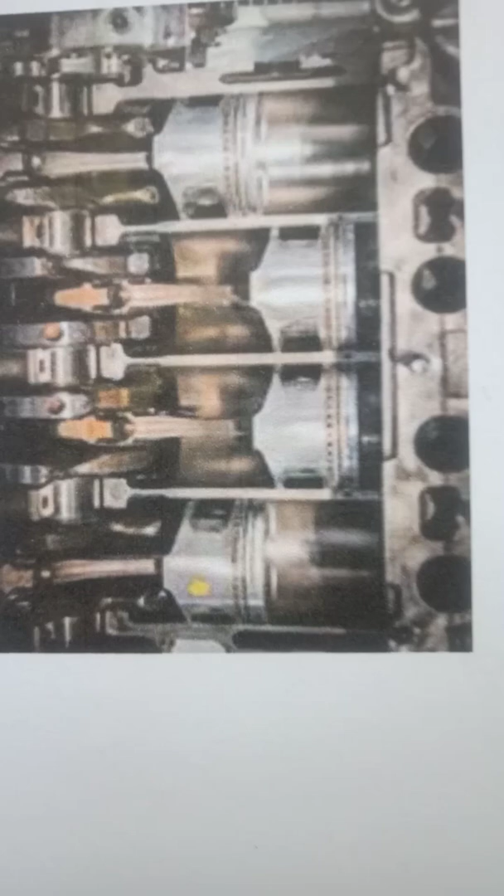So good morning friends, today we will discuss the honing process. Honing is a super finishing process used to remove a very fine amount of particles from cylindrical surfaces, such as the cylindrical bore shown in this figure. This is the cylindrical bore in which the piston is reciprocating up and down.

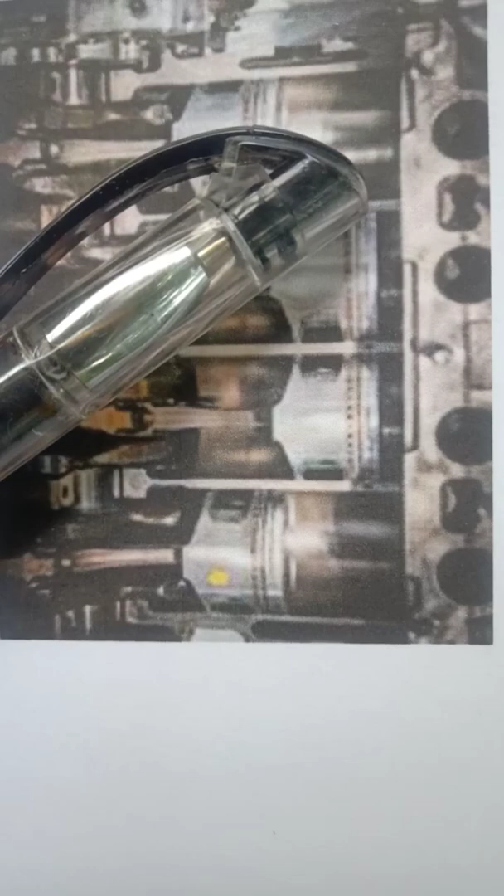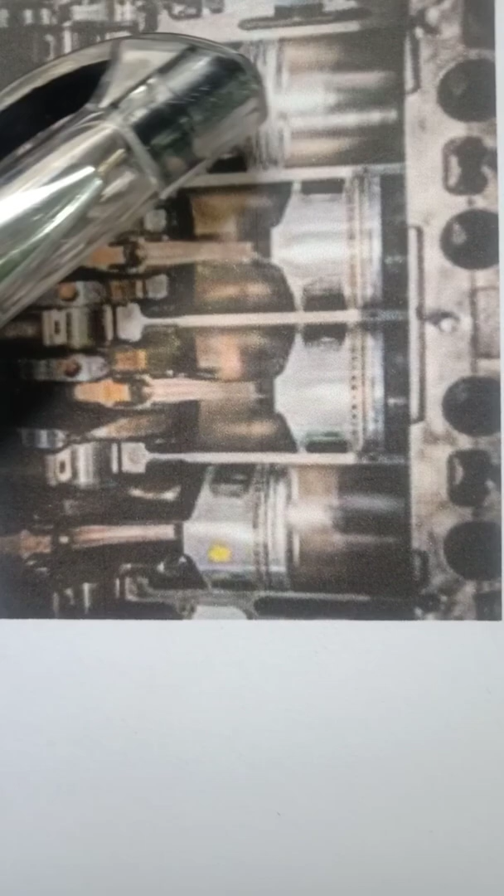Now what happens inside the IC engine after running it for a prolonged interval of time, such as 2 lakh to 3 lakh kilometers? The gap between the piston and cylinder increases substantially. Due to continuous reciprocating motion, there is wear and tear of the piston and cylinder, and the cylinder gets worn out, meaning the bore of the cylinder gets enlarged, causing excessive clearance between the piston ring and cylinder bore.

Now if there is excessive clearance between the piston and cylinder bore, then all the compression present during the compression stroke, during the power stroke, all the pressure generated at the top of the piston will escape out from this gap between the piston and cylinder, that is, between the compression ring and the cylinder, into this clearance volume.

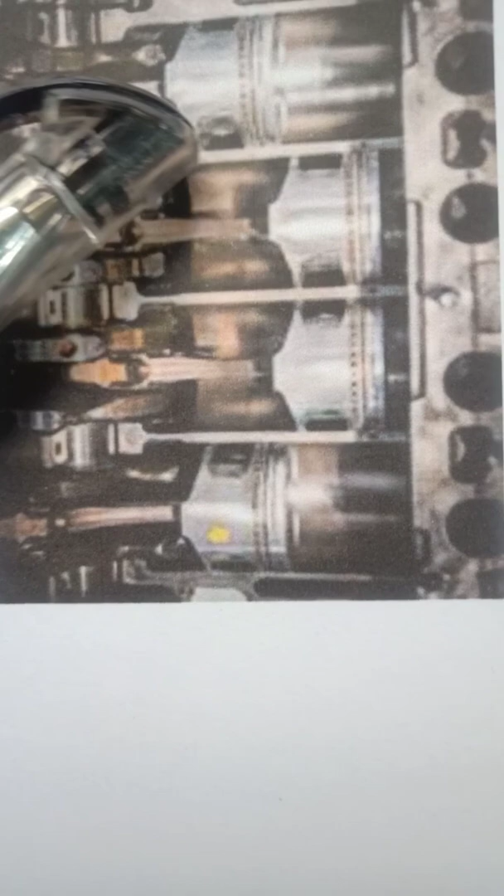Due to that clearance, the pressure generated will escape through this gap into the crankcase, causing back compression in the engine. That means the compression pressure present at the top of the piston will be reduced, and due to this the power and efficiency of the engine will be reduced.

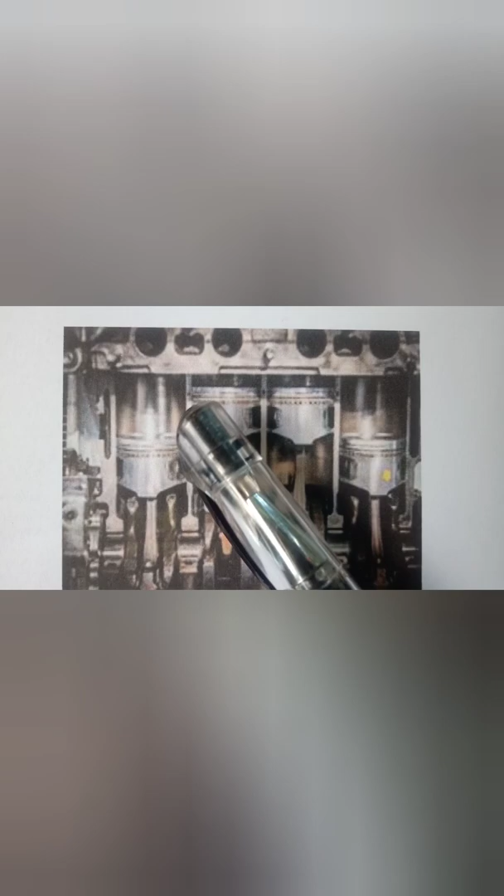Now this problem of back compression can be restored by enlarging the bore of the cylinder, that is, increasing the bore diameter and putting an oversized piston inside it, so that the clearance between the piston ring and cylinder wall is at the recommended level. It should not be too large and should not be too small.

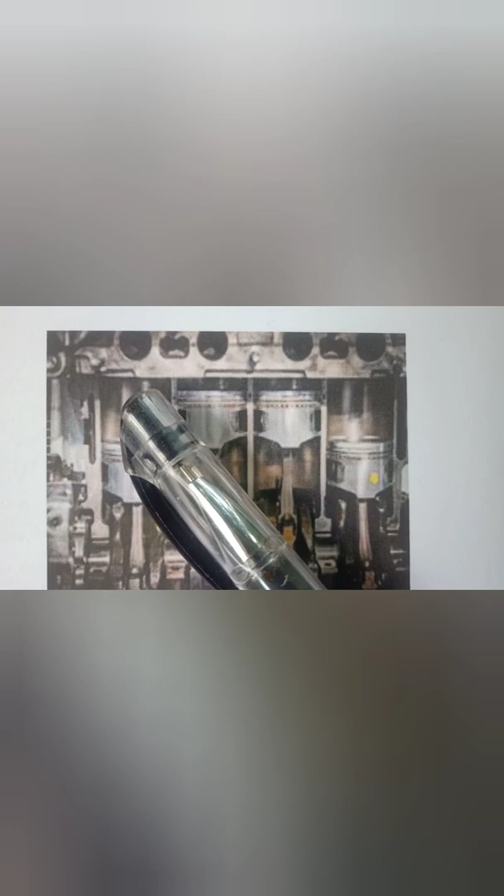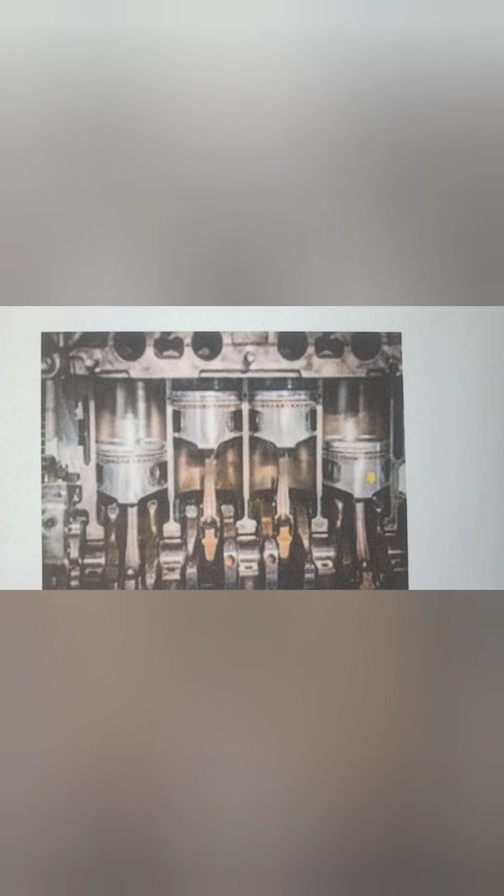If the clearance between the piston and cylinder is too large, then all the pressure produced during the power stroke in the clearance volume will escape through this gap between the piston and cylinder, and the pressure on the piston will be reduced. Due to this, the power and performance of the engine will be reduced. And if the gap is very small between the piston and cylinder, then as the engine temperature rises...

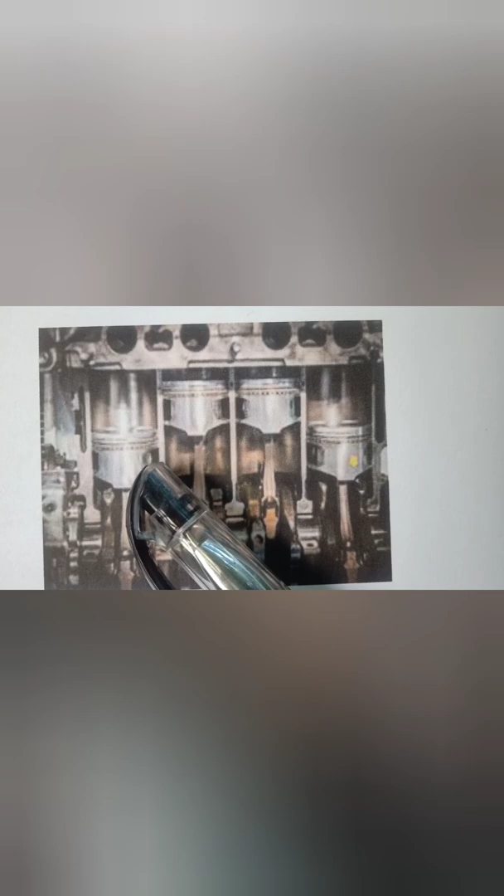As the engine temperature rises, due to expansion there is no clearance between the piston and cylinder, so the piston will not reciprocate. As there is uneven expansion of the piston and cylinder, the piston will not reciprocate freely, and there is power loss due to excessive friction between the piston and cylinder. In the worst case, the piston and cylinder will get seized if there is no clearance volume between them.

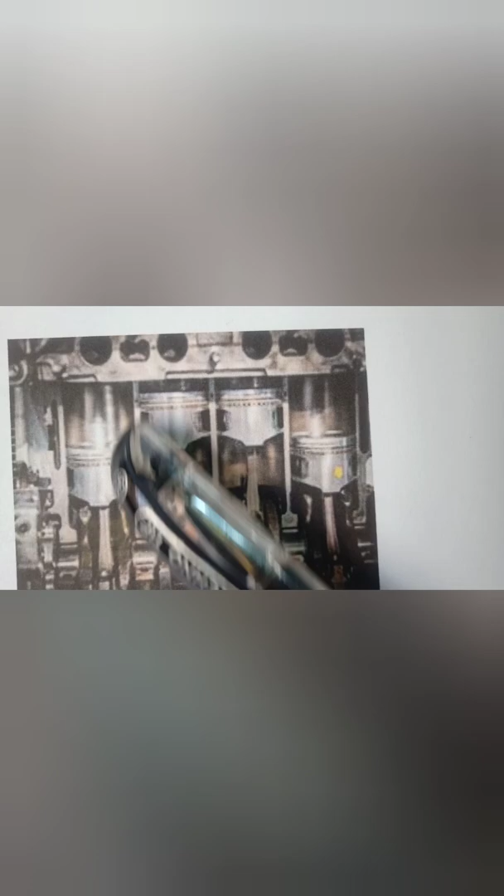So this clearance is very important between the piston and cylinder. In other case, if the clearance is excessive, this is also harmful because most of the pressure generated in the power stroke will escape through this clearance, causing back compression.

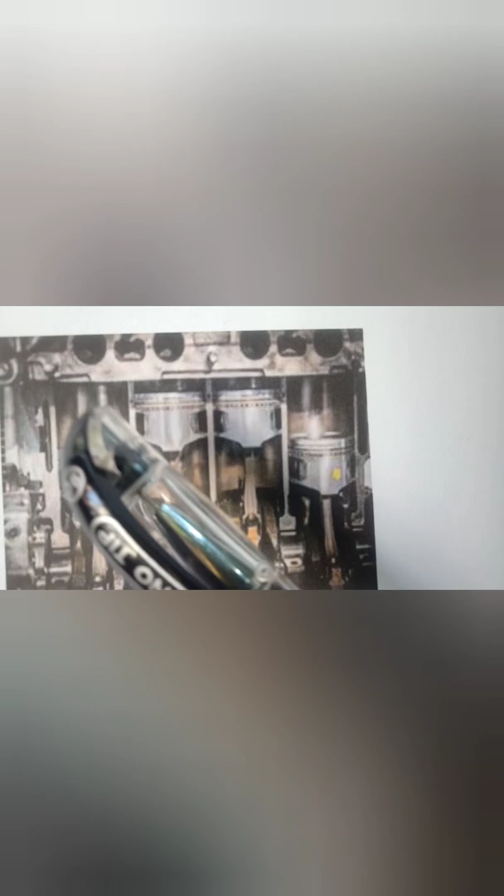So in that case, we have to bore this cylinder, and we have to install an oversized piston in this bore, that is, in this cylinder.

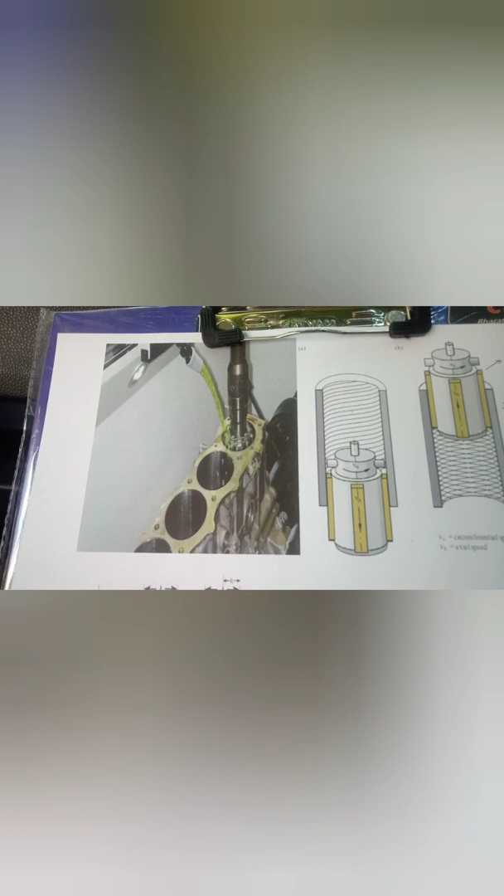Now this is typically a boring process in which there is a vertical boring machine where the cylinder is bored to a larger extent, that is, the diameter of the cylinder is increased slightly, and due to this a bigger diameter piston can be inserted inside the cylinder. So this is the boring process.

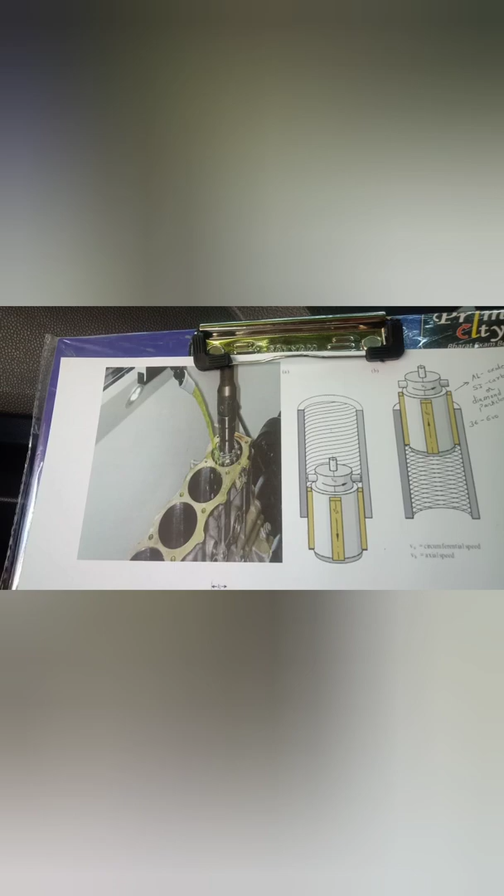So this is a boring tool which will remove the material inside the bore, and this is the coolant. The coolant is added in this boring process so that the boring chips can be carried away by it.

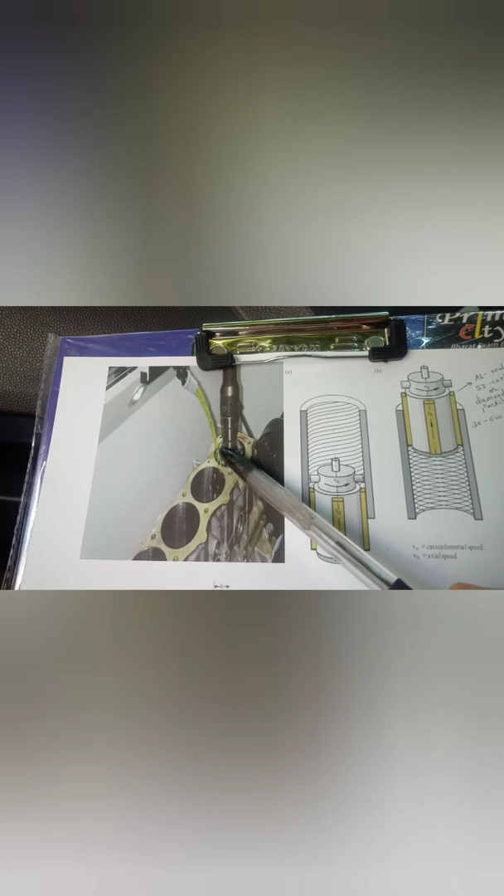After boring, the honing process will be done on this bore. After boring all four cylinders, the honing process will be done. Now what is the honing process? We will see that now.

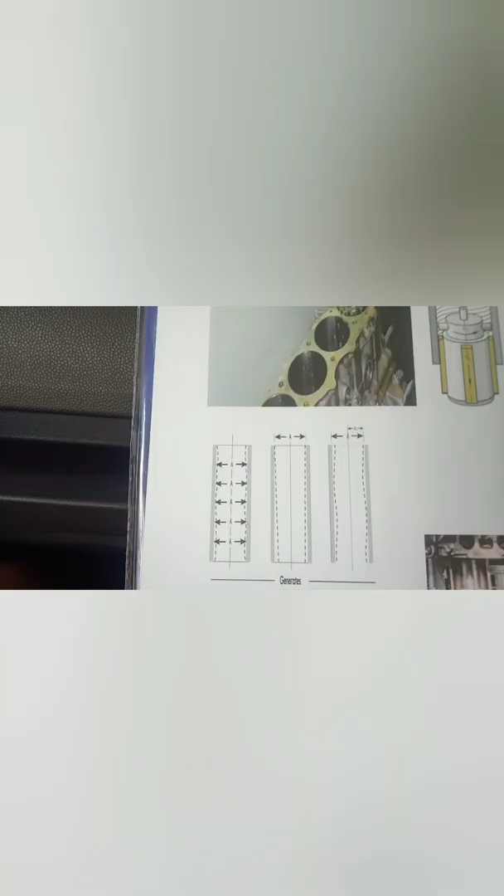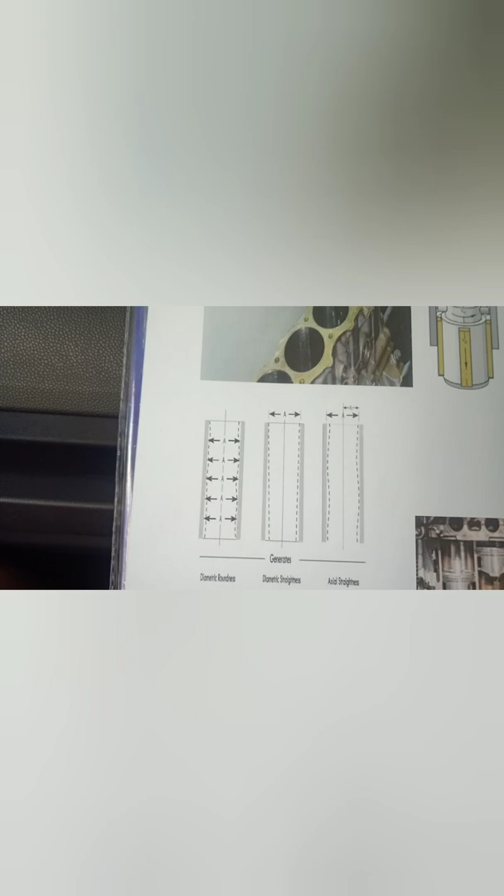If we bore any cylindrical surface, it is not always possible for the boring to be 100% perfect. There are certain irregularities in the boring, such as diametric roundness - that is one problem in boring - and then diametric straightness.

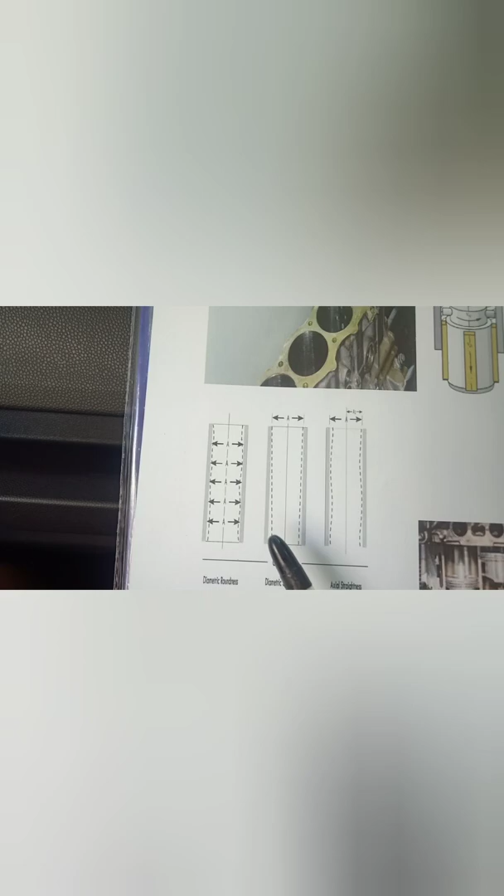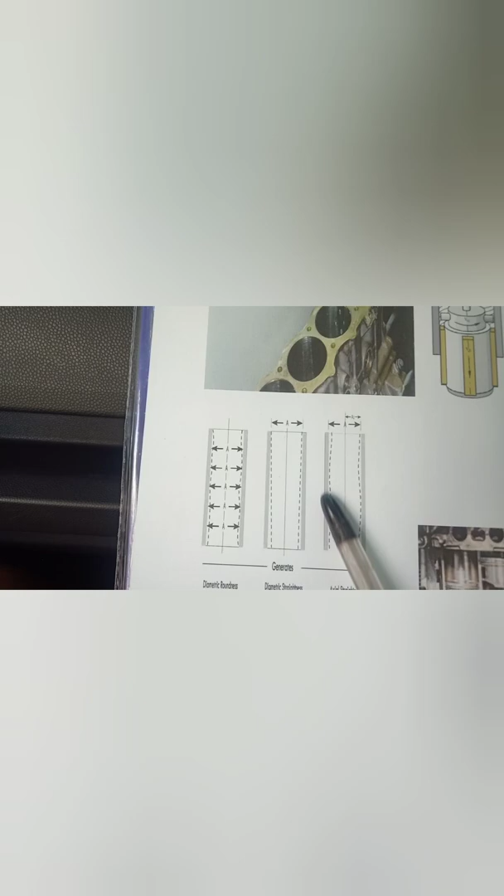Okay, straightness is not there. This is a tapered one. The boring is slightly tapered. This is also not accepted. Then third is axial straightness. Axial straightness is not there. Somewhere there is excessive boring, somewhere there is less boring. That is, the straightness is not there. So these are the problems faced during boring.

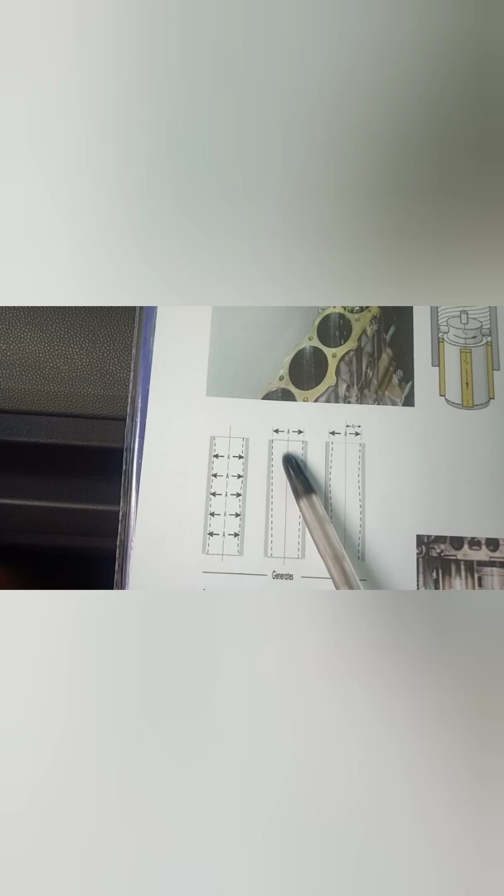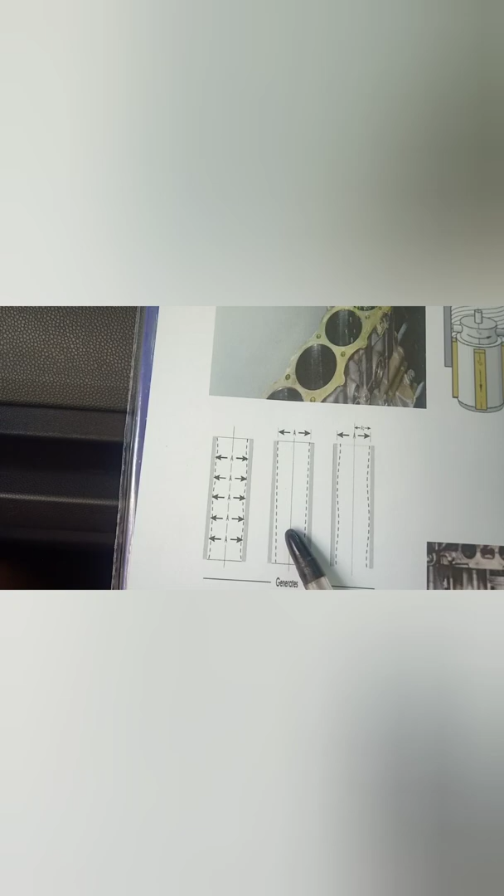So what happens if we bore the cylinder and directly install the piston? The piston will not reciprocate properly in such kinds of bores. For example, in this portion the piston will reciprocate freely, but as the piston moves down, it will not reciprocate freely here, because there is a diametric straightness problem. As you see in the diagram, the diameter is reduced here as compared to there, due to which the piston will get jammed in this portion. In this portion the piston is relatively free. So the piston will not reciprocate in such kinds of bores.

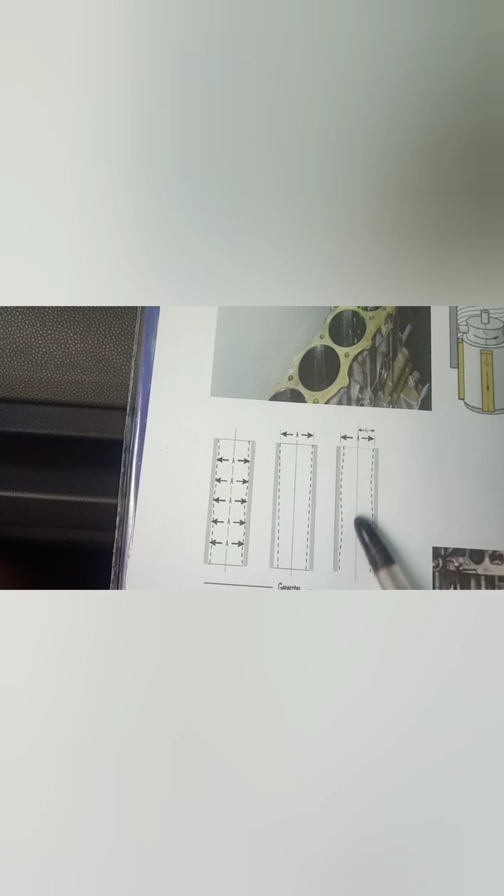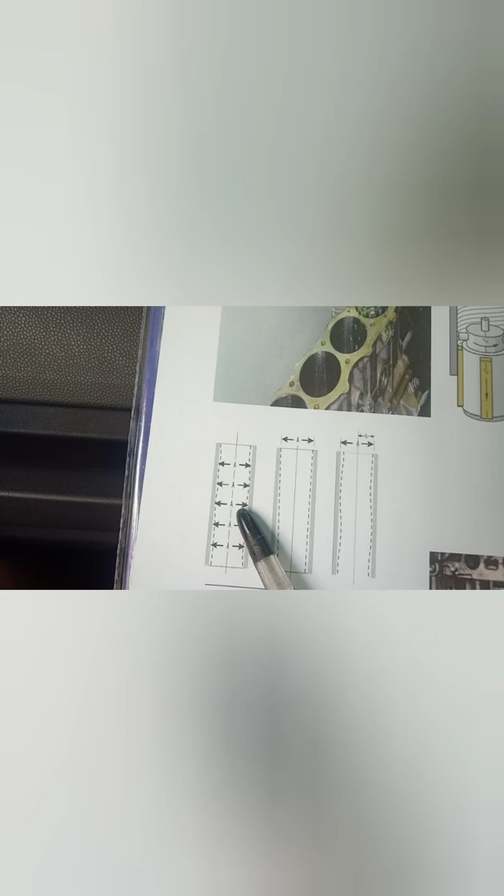So these defects have to be removed, and it is very important to remove such kinds of defects. For this purpose we have to perform a super finishing process called the honing process. Now, what is the honing process, that we will see.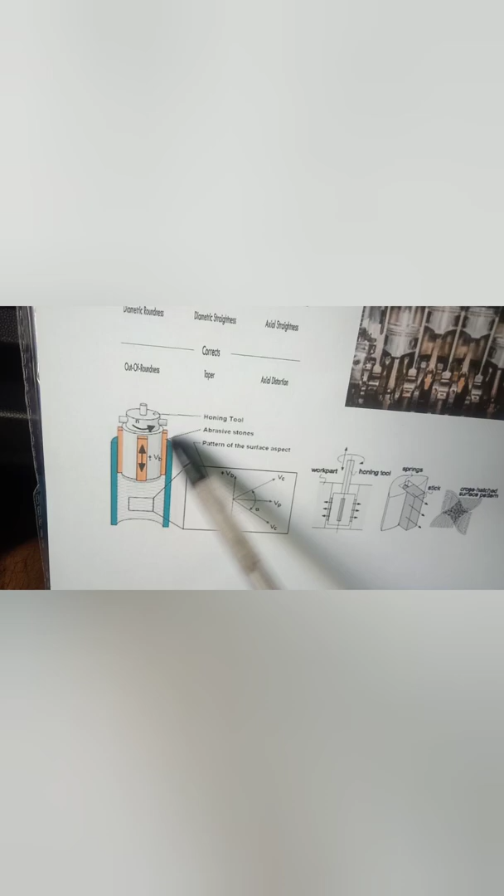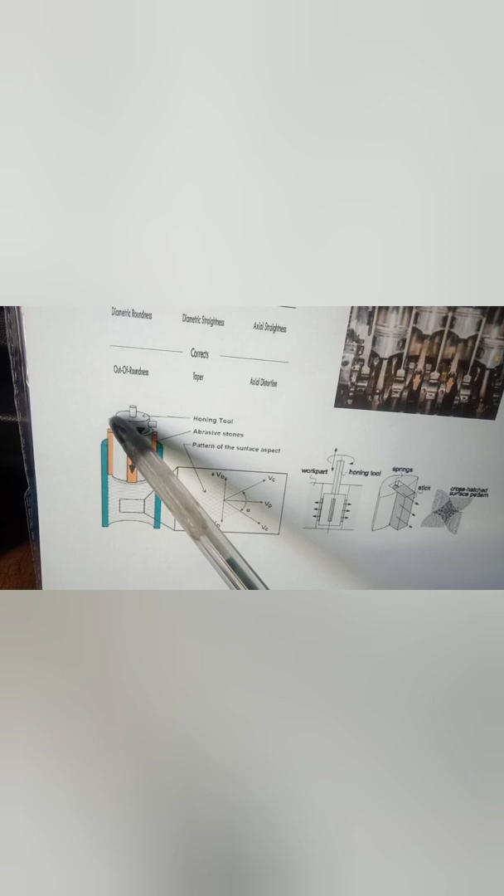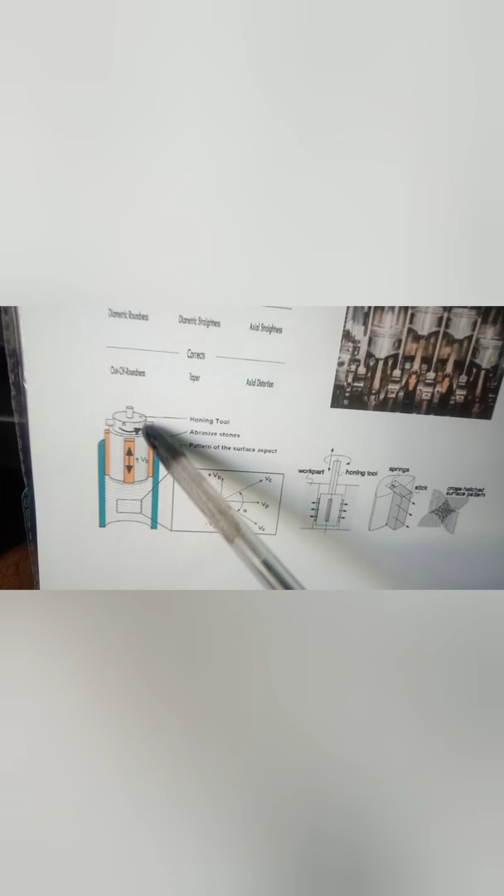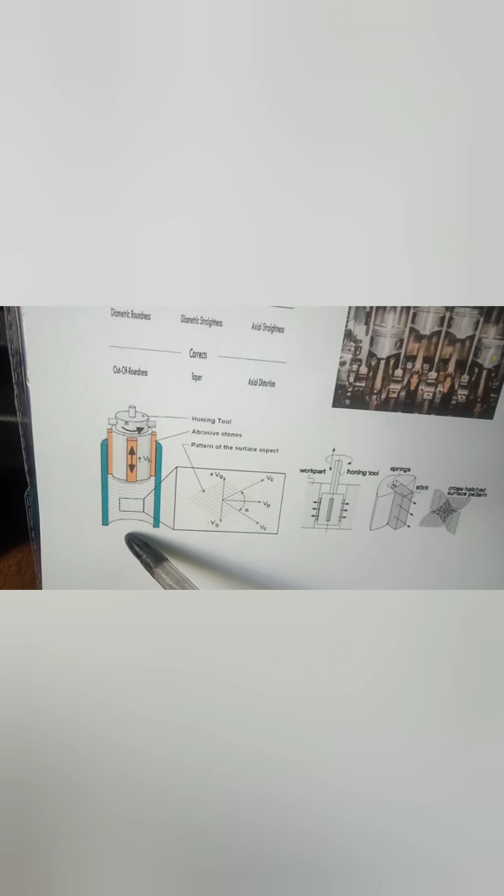Now to remove the above mentioned defects, as I showed earlier, this honing tool is used. This is the honing tool in which there are abrasive stones like this. These are the abrasive stones, and this is the cylinder in which this honing tool will rotate in the anti-clockwise direction as shown by this arrow. At the same time this honing tool will also reciprocate up and down, by this arrow. So the honing tool has a rotational motion as well as a reciprocating motion. We have to give both motions simultaneously to this honing tool. Now, how the honing process works, that we will see.

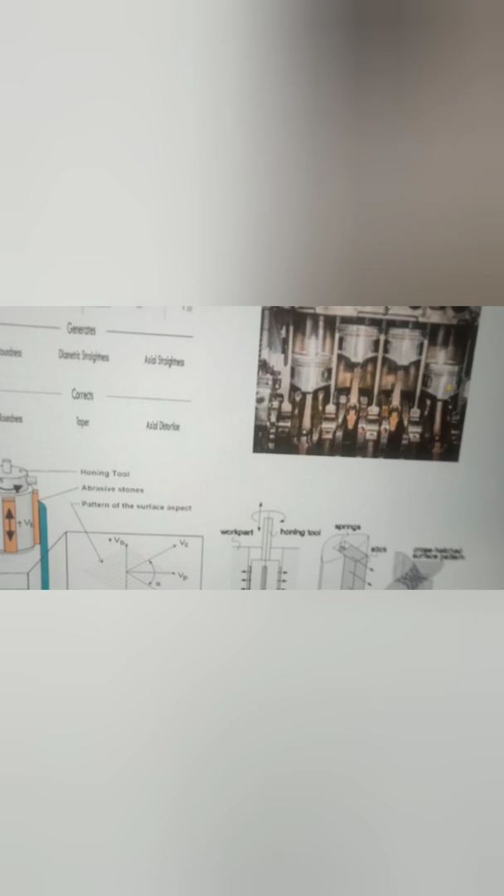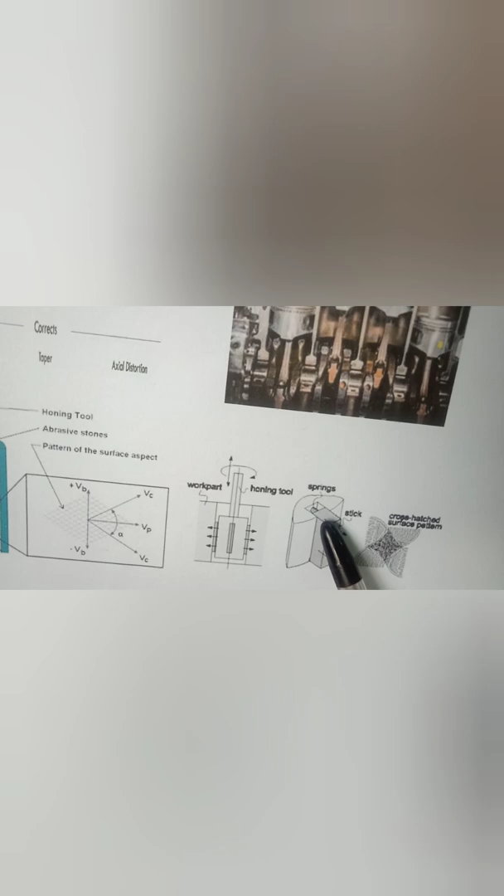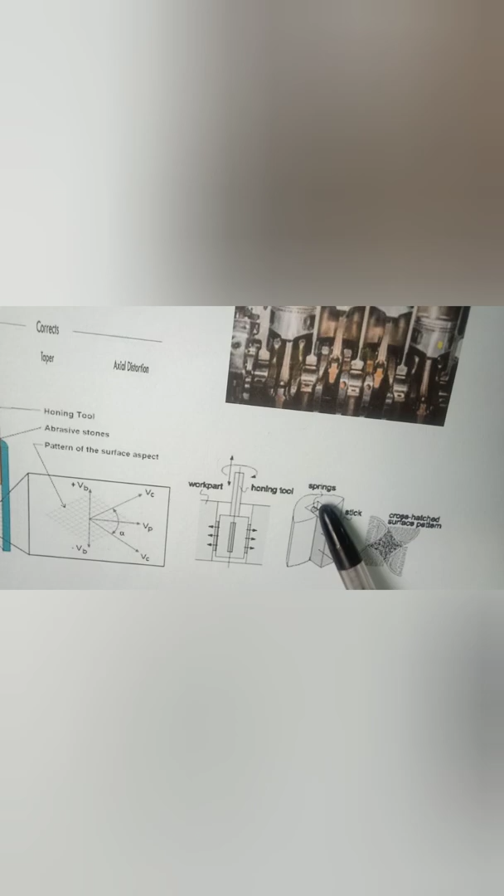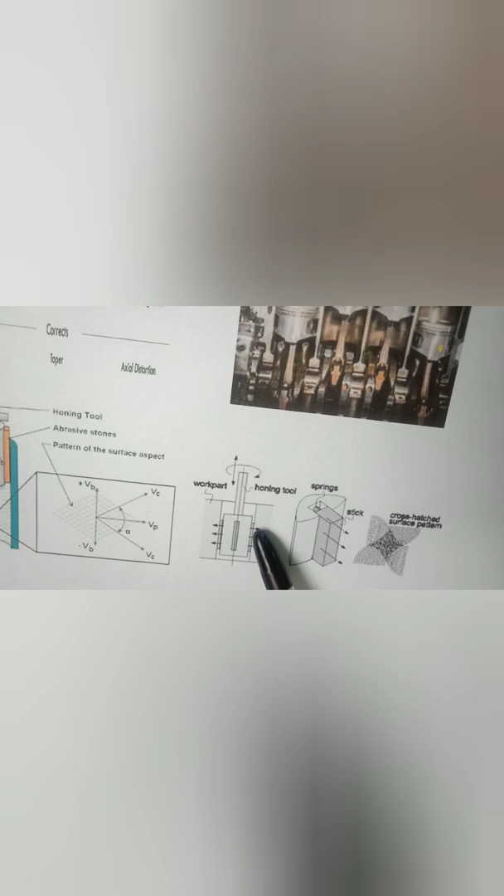Now this is how the honing process works. This is the honing tool, and this is the abrasive stone. The abrasive stone is fixed in the grooves of the honing tool. The honing tool has grooves in which the abrasive stone is attached like this, and in between this honing tool and this abrasive material there is a spring. So the spring will always try to decompress and push this abrasive stick towards the inner portion of the bore, the inside portion of the bore. So this spring will always push the abrasive stick towards the inner surface of the bore, like this.

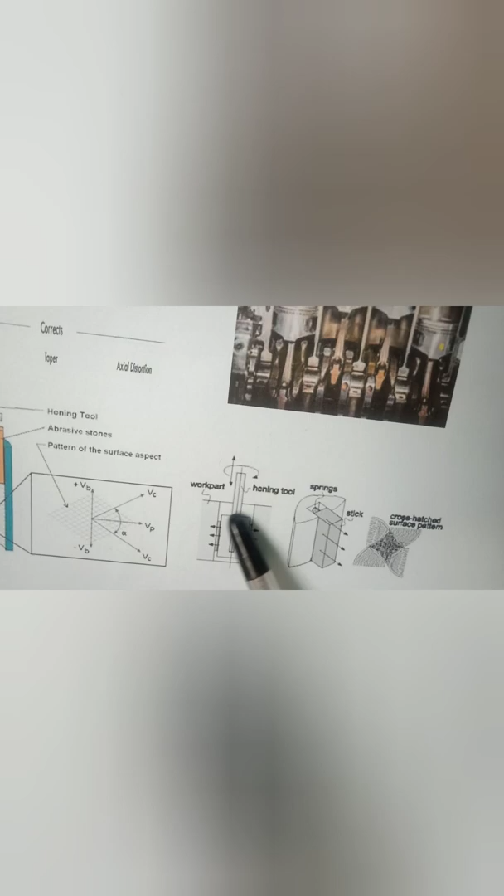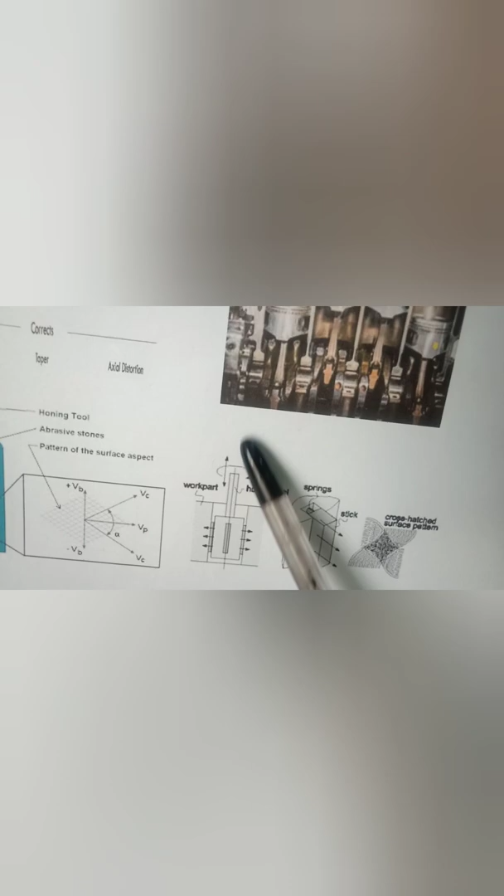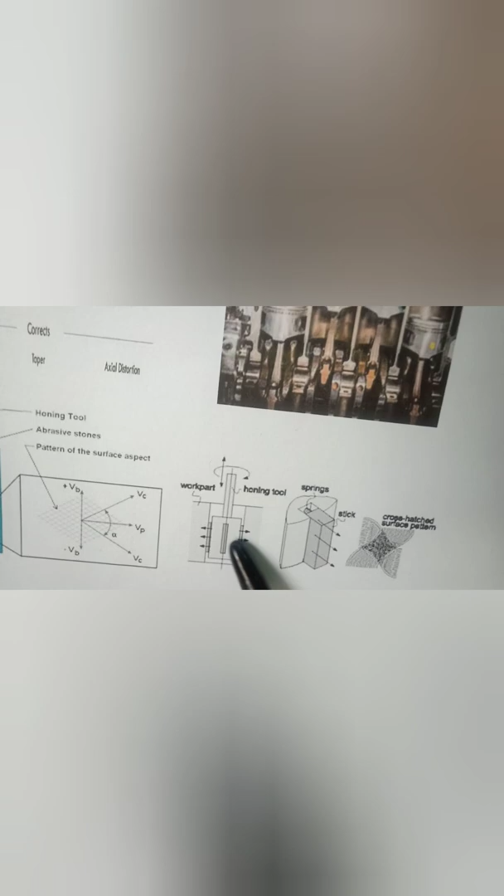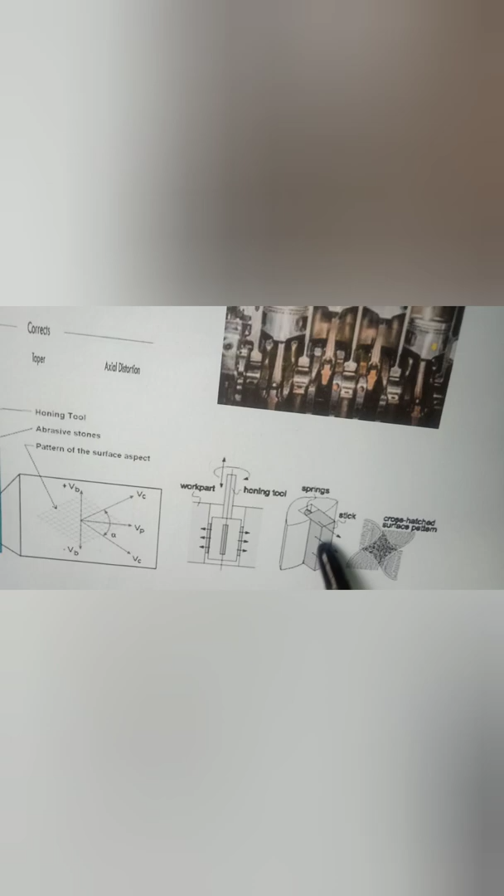That means there is a direct contact between the abrasive stone and the inside surface of the cylinder, which we have to hone, as shown in this figure. Now, as there is a direct contact, once we give the rotational motion as well as the vertical, reciprocating motion, due to this abrasive stone there is a fine grinding of the inner surface of the cylinder. The abrasive stone is made of aluminum oxide or silicon carbide, or diamond particles. These are extremely hard materials. These abrasives are bonded together, and these very hard bonded particles remove a very fine layer of the inner surface of the cylinder.

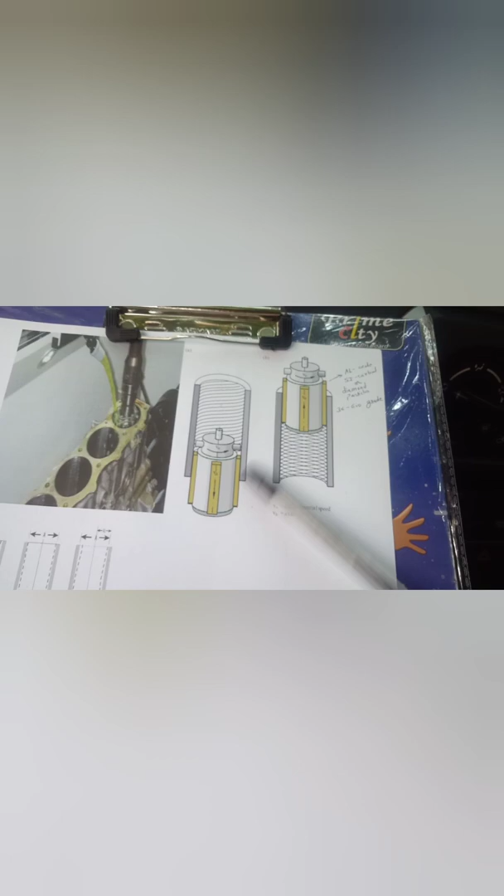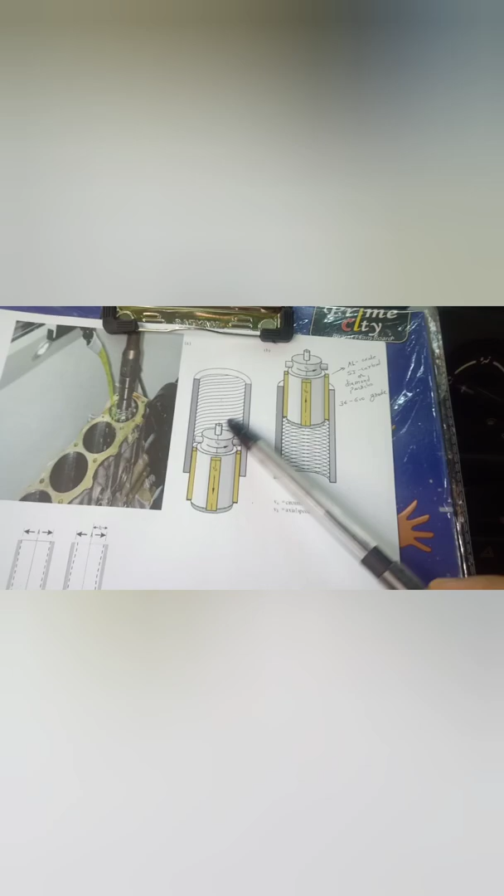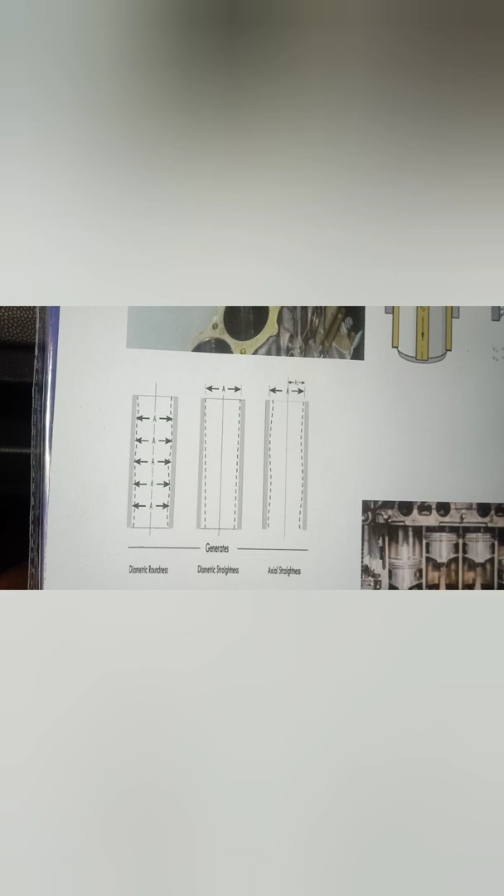So this is another diagram of how the honing takes place. These abrasive stones, which are in direct contact with the inner portion of the cylinder, remove the very fine, minute layer of irregularity, all the irregularities and unevenness inside the cylinder. These abrasive particles remove them by a rubbing and grinding process. And all the defects I showed, such as diametric roundness, diametric straightness, and axial straightness, all these irregularities will be taken away by this honing tool.

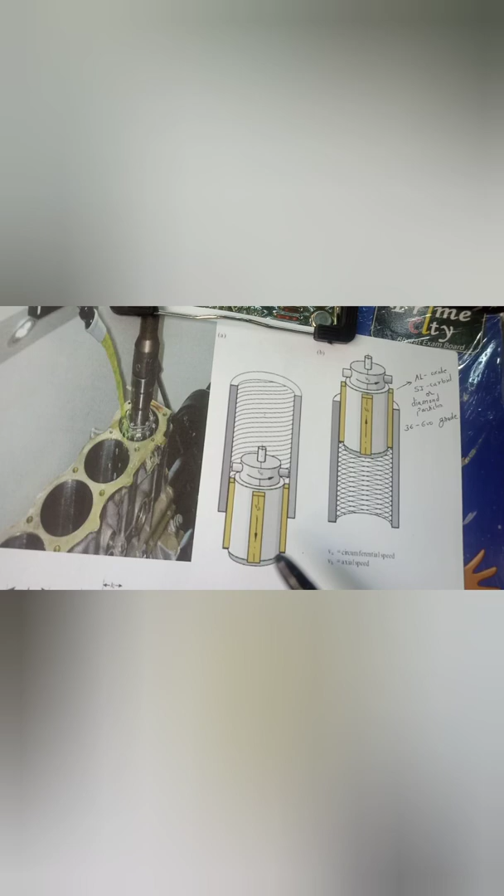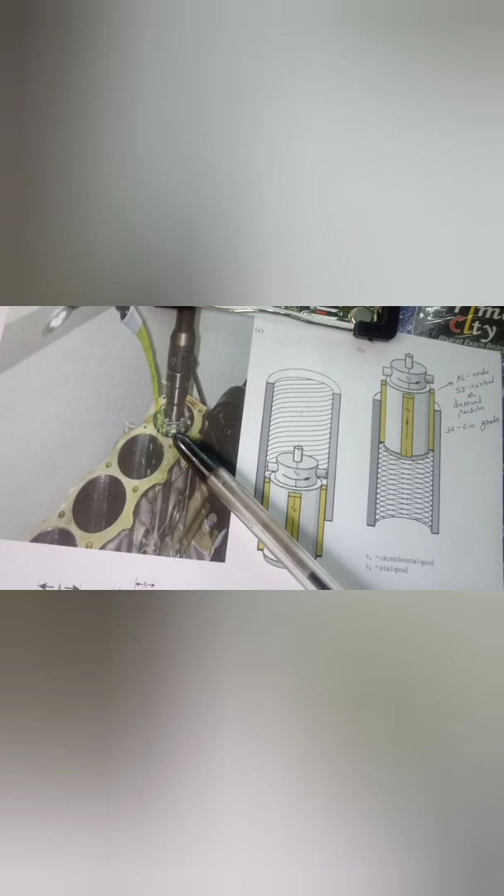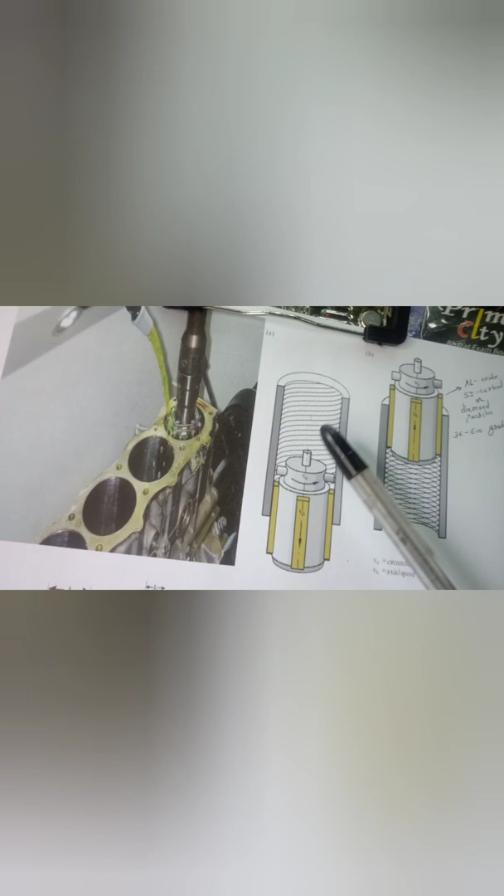So this is how the honing process takes place in the automobile IC engine when there is a large gap between the piston and cylinder. If you have to overhaul any engine after a few lakh kilometers, then boring is done, and after boring this honing process has to be done, so that there is no uneven surface inside the cylinder, and the piston will reciprocate very freely, and the gap between the piston and cylinder is maintained throughout from TDC to BDC, so that the engine can perform efficiently. So this is how the honing process takes place.